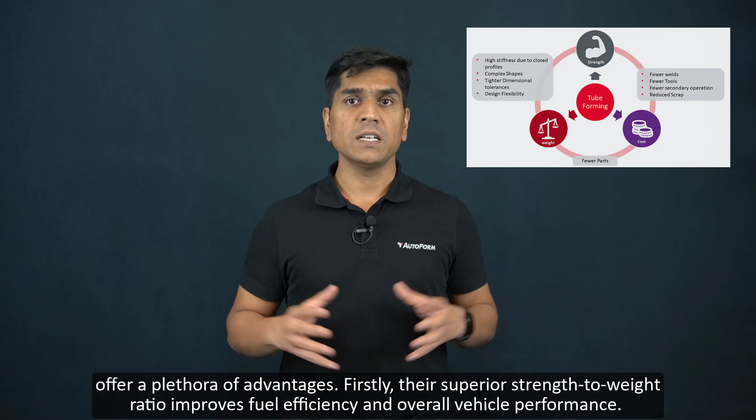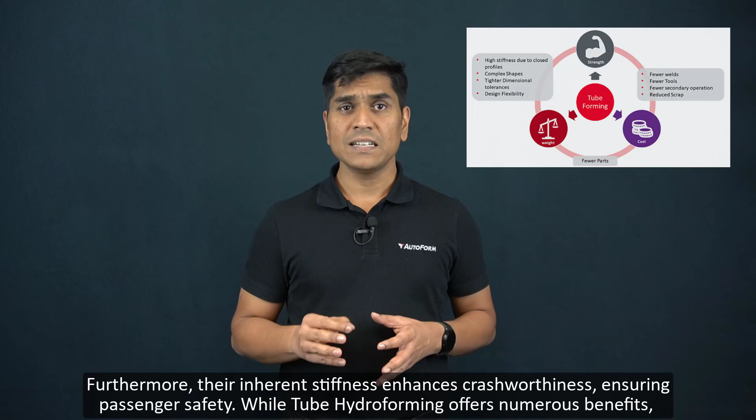Compared to traditional sheet metal components, tubular parts offer a plethora of advantages. Firstly, their superior strength to weight ratio improves fuel efficiency and overall vehicle performance. Furthermore, their inherent stiffness enhances crashworthiness, ensuring passenger safety.

While tube hydroforming offers numerous benefits, it also presents its fair share of challenges. One of the primary concerns is the process complexity, because of which finding out the optimum process design and parameters can be quite challenging sometimes.

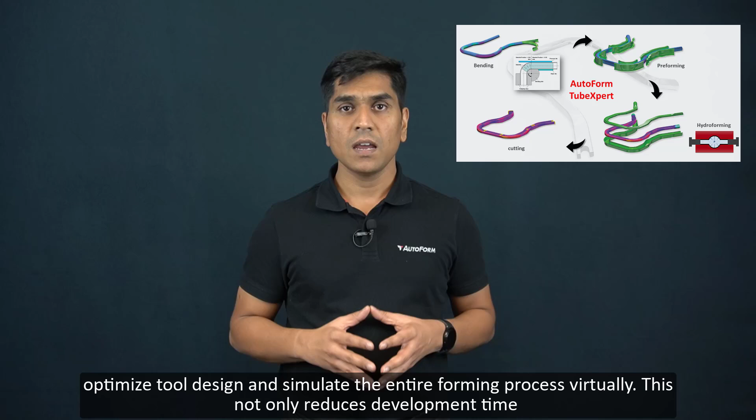Fortunately, advancements in digital simulations have revolutionized tube hydroforming, mitigating many of its inherent challenges. Through sophisticated software, engineers can accurately predict material behavior, optimize tool design, and simulate the entire forming process virtually. This not only reduces development time and cost, but also ensures the production of high-quality components with precision and reliability.

Two approaches commonly employed for process optimization during engineering are the traditional hit and trial method and the systematic process improvement approach. So let's explore the benefits of the systematic process improvement approach over its traditional counterpart.

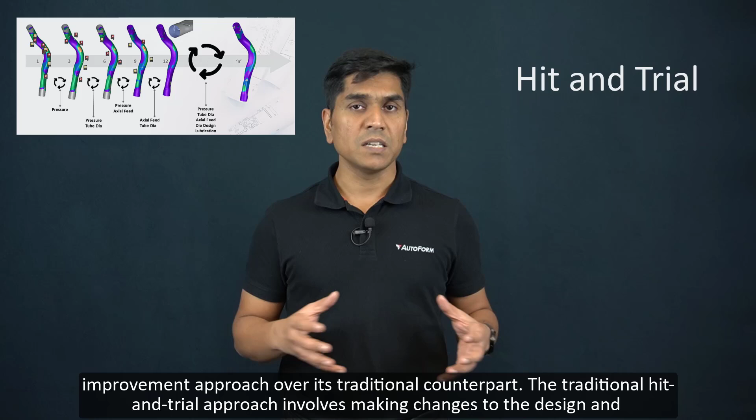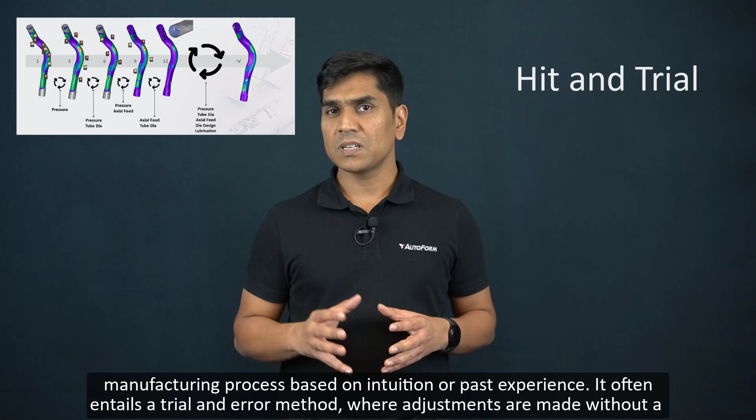The traditional hit and trial approach involves making changes to the design and manufacturing process based on intuition or past experience. It often entails a trial and error method where adjustments are made without a clear understanding of the underlying causes or potential outcomes. While this approach may yield some improvements, it is inherently inefficient and can lead to prolonged downtime, wasted resources, and inconsistent results.

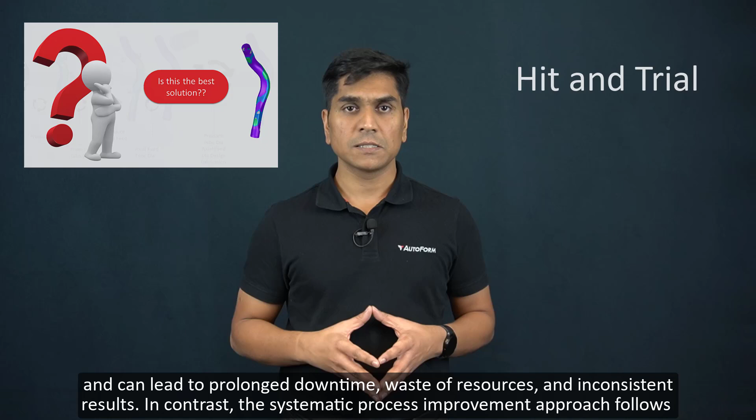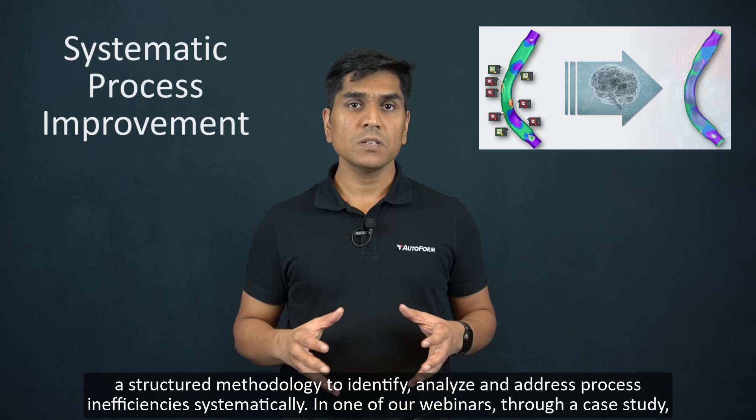In contrast, the systematic process improvement approach follows a structured methodology to identify, analyze, and address process inefficiencies systematically. In one of our webinars, through a case study, we demonstrated in detail one such systematic approach to optimize the tube hydroforming process, wherein we optimized several process parameters like tool design, tube thickness, axial feeding system, fluid pressure, and tube diameter through a smart and systematic approach.

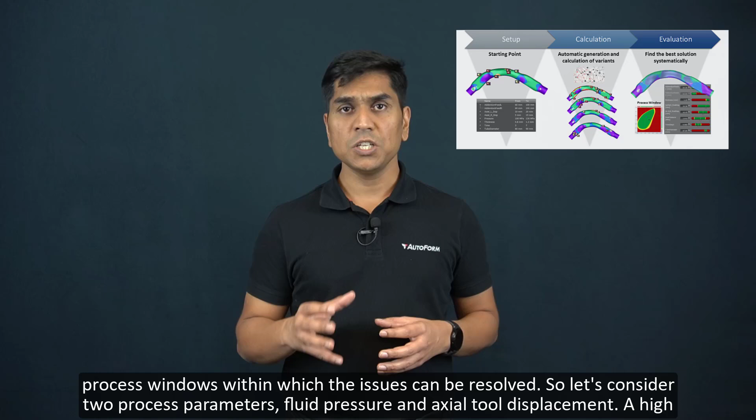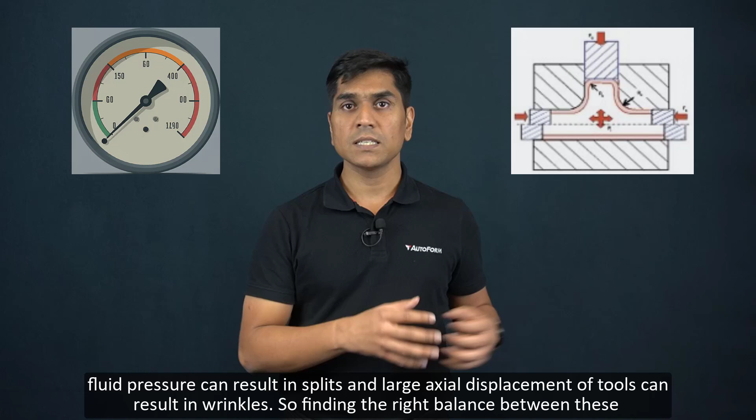With this smart approach, we could not only identify the issues, but we could also find the solution with the clear identification of the process windows within which the issues can be resolved. So let's consider two process parameters, fluid pressure and axial tool displacement. A high fluid pressure can result in splits, and a large axial displacement of tools can result in wrinkles. So finding the right balance between these two parameters is critical.

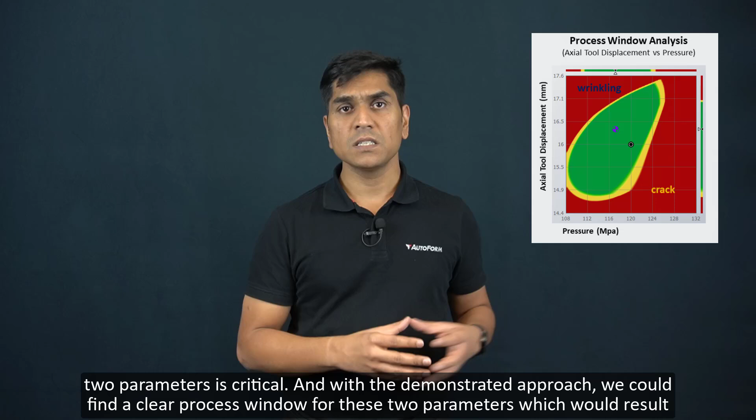And with the demonstrated approach, we could find a clear process window for these two parameters, which would result in the tube forming without any splits or wrinkles. So in conclusion, while the traditional hit and trial approach may offer quick fixes, it pales in comparison to the systematic process improvement approach regarding efficiency, effectiveness, and sustainability.

So by embracing a structured methodology and fostering a culture of continuous improvement, organizations can unlock their full potential and thrive in today's dynamic business environment.